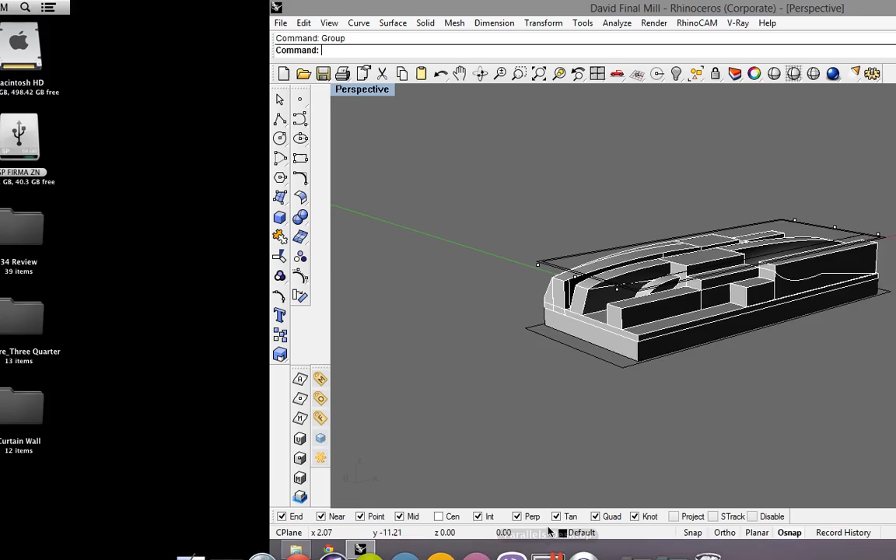I have Windows open right here. This is one of the template files I'll send you guys, and I'll probably just send it with David's model so you know where to position everything.

David's model at the moment has the top of his model resting on the CPlane. So you guys will just have to drag your models in here. There's a little box in here—just drag it to one of the corners so it's flush in line with David's model, and then delete David's model out of the way.

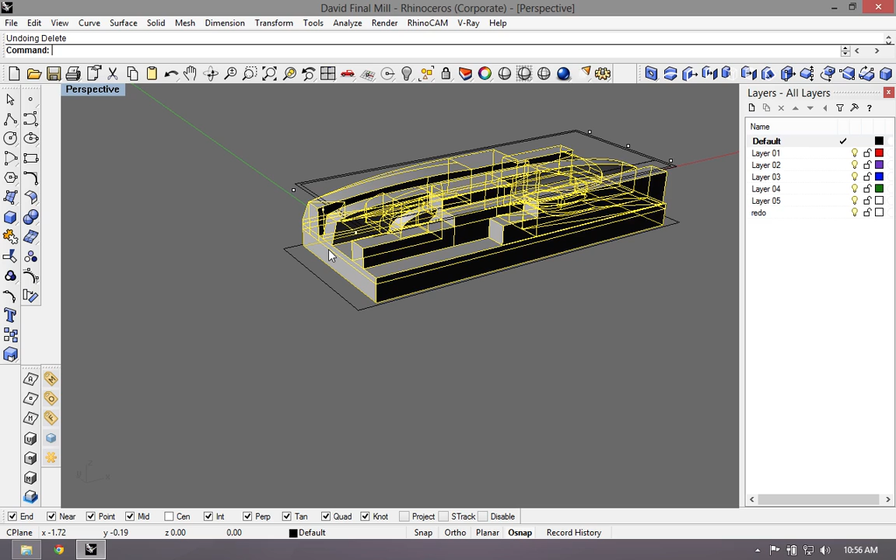Go ahead and open RhinoCAM, if you haven't already done so. Let me adjust my screen here.

I'm going to go through all of these—I guess they're called machining operations—and these are the ones that you're going to have to do. They're called mill passes when you're actually doing them on the mill. So I'll go one by one and tell you what you guys need.

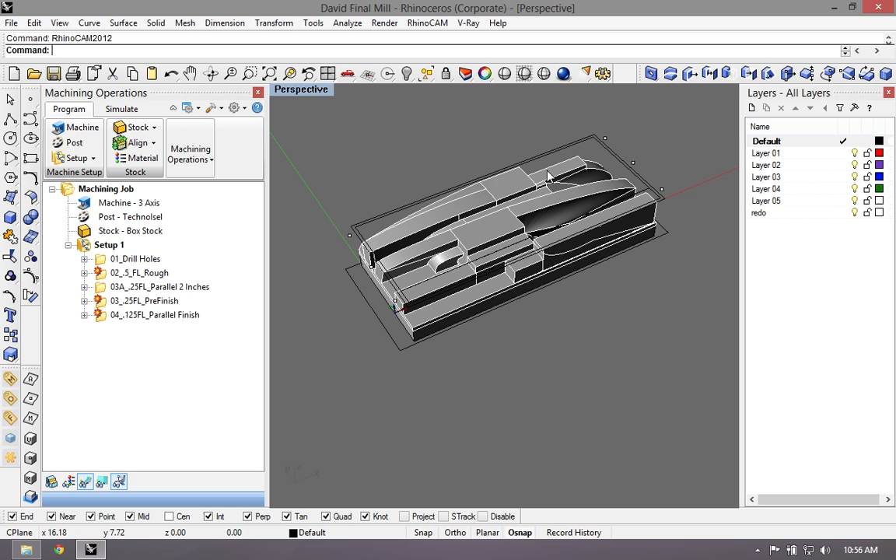So if you open up the template, you'll notice that you have these 6 dots, 6 points right here. Try not to move those points. Those points are going to define the spots where you're going to drill your screws, and those are important because we need them in the material, but not touching your model.

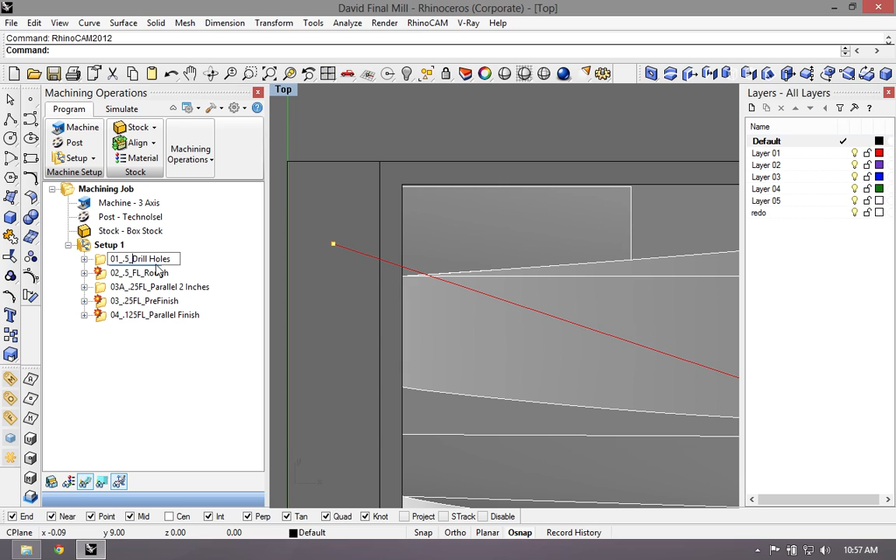So these drill holes are going to be made with, I guess, a 0.5 drill bit, so the 1/2 inch drill bit. I'll put that in there so everybody knows. They're going in about 2 inches into the material, that way they carve a nice hole, a nice little tunnel, so you can insert a drill and see how far it's going. Your drill head will be right here, going all the way through the bed. That's important for everybody to have, so we can secure the piece of foam into the bed.

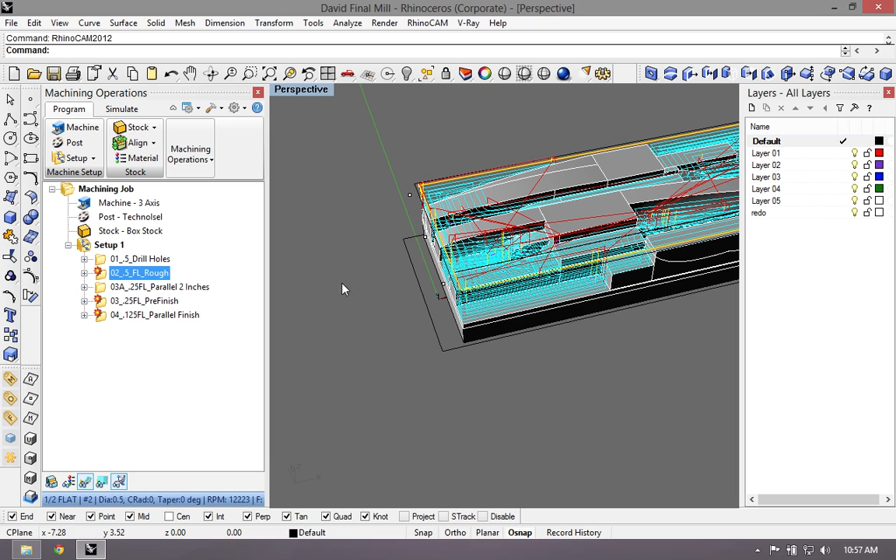The next step that we're going to do is the rough, and this is going to be done with the same 1/2 inch bit, so you won't have to switch bits between passes. As you can see, these blue lines represent where the drill bit is going to be traveling through. The red lines represent every time the drill bit has to reposition itself around the model, so it goes up to not touch your model.

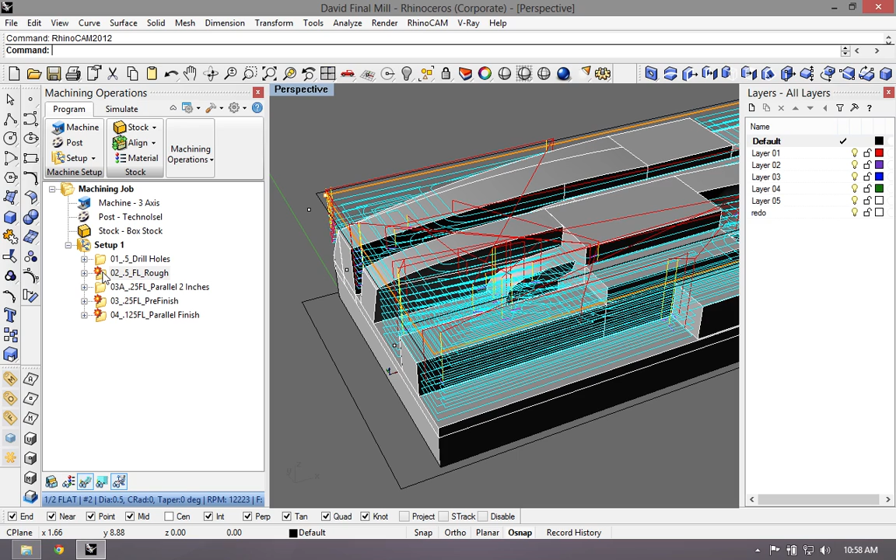We're going to open that and redo it in a second—I'll show you guys how to redo all that, but I'm just going to go through the different passes first. Keep in mind they're labeled 1, 2, 3, and 4. 3A is just something in between, so they still go in order. Number 2 is the rough pass that we just talked about.

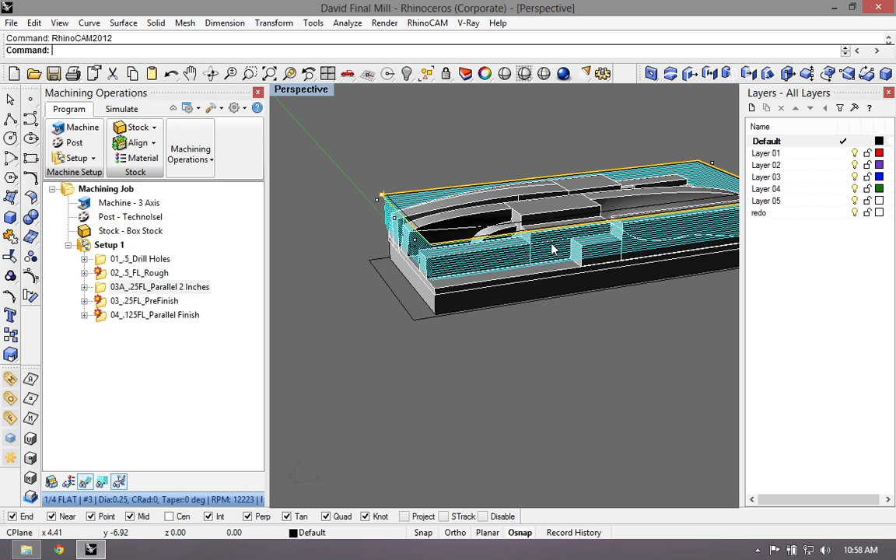The number 3A pass is going to be an important pass because there's no machine that can actually cut our 4-inch thick piece of high density foam in one pass. So it's important that we cut it down, and this is basically what this is doing—taking the drill bit and going around your material and making kind of like a plateau around it.

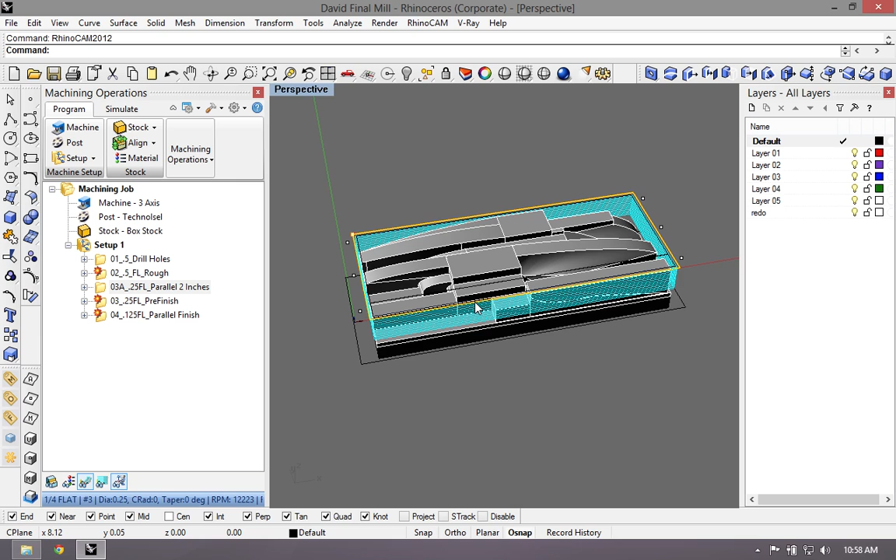This is going to make a 2-inch plateau, so that we can just put it to the bandsaw, the table saw, and cut that off in one pass and not have to flip it over and mess up the face of your mill. That's an important step, and everybody should have it in their piece.

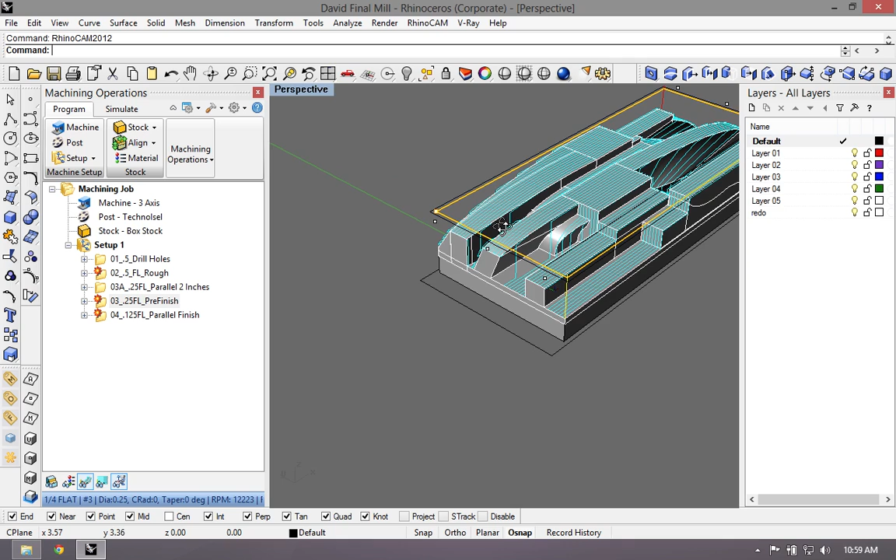After that, we're going to do the pre-finish, and the pre-finish is going to be done with a 1/4 inch drill bit flathead. As you can see, it just kind of goes in there and removes the rest of the material without actually touching your model, the finish of your model. So we're just going to go over and remove any excess material.

That way the 1/8 inch bit parallel finish can just go in smoothly and not really have to go through a lot of material and break. This is high density foam, and sometimes the 1/8 inch bits can break.

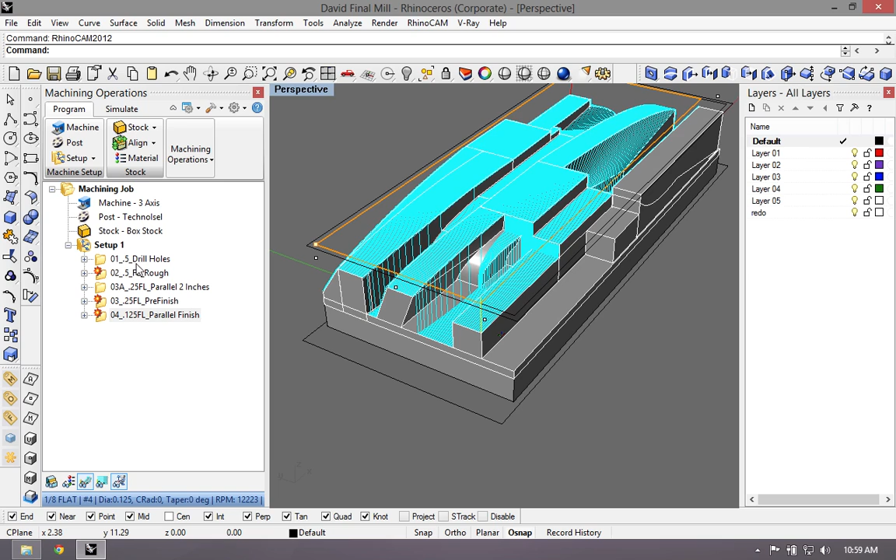So I'm going to have to fix this. Right now it's going over only this rectangle, but it has to go over the full rectangle. So let's go ahead and delete these, and I'll show you guys how to set these up. The drill holes, you're not going to have to redo - they're already going to be there. Actually, let's just go ahead and delete them and do them over. It's fine.

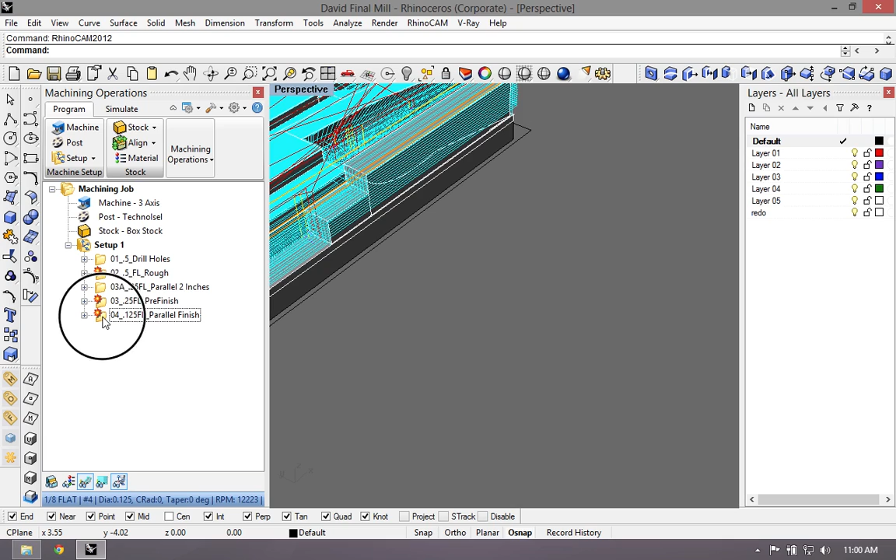I'm having a little bit of trouble here with my keyboard. Let me see if I can delete these guys. There you go.

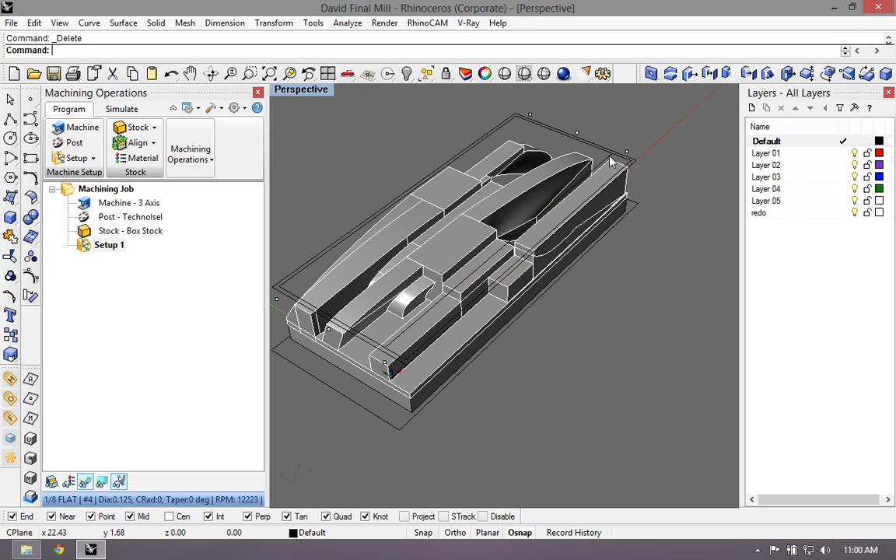Okay, so first step, I'll make sure these little in-between rectangles don't exist. So you only need this one and this one.

Okay, so first of all, we're going to do the drill pass. Select all your points, and you can do that by going into this little button here and selecting these little point things, or you can just go manually and select all of them. And you're going to go to the machining operations, and it's called a hole. So you go in there and you do a drill.

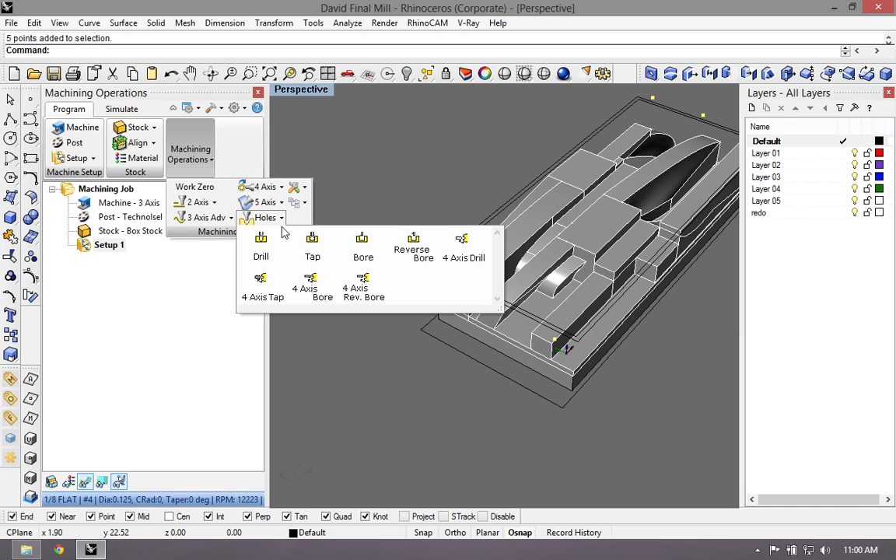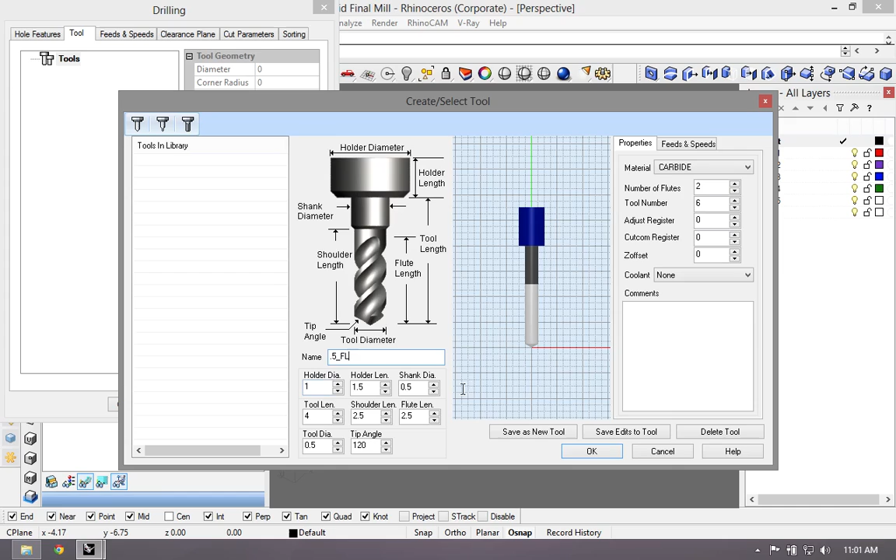Okay, you're going to make a tool. I already have it made, but let's just delete it so you can see how you do it. You're going to go edit, create tool, and from there you're going to select this one, the first one, and then just tell it that it's a 1/2 inch diameter - the drill bit is 1/2 inch in diameter - and name it 0.5 flat, because we're using a flat. So just save as new and hit OK.

Then as soon as you do that, it'll show up here, and that's the one you just have to select it and tell it that's the one you want to use. Feeds and speeds, you don't have to mess with that in any of the settings, not even the passes.

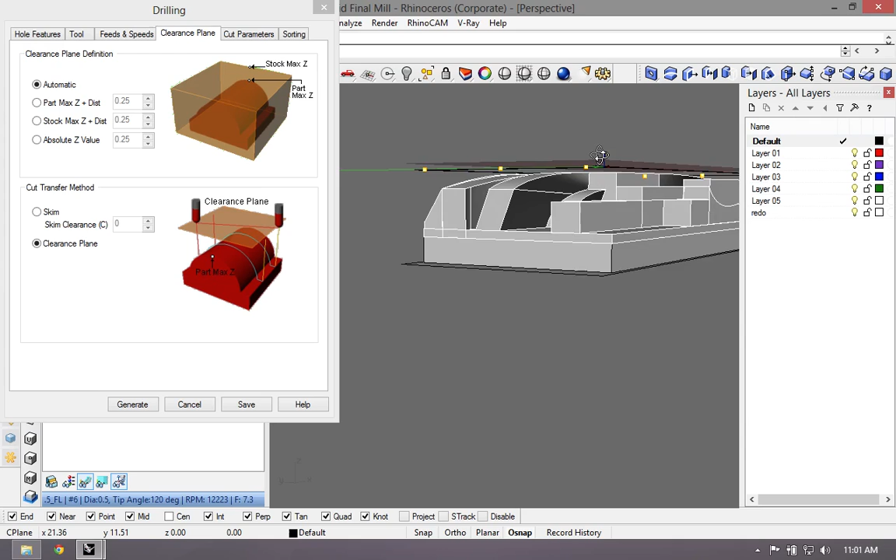Clearance plane, it's set to automatic right now. Automatic just goes a 1/4 inch above your material, so just make sure that visually it looks like it's going above your material, and this looks fine here.

And then this is the cut parameters. This is the most important step on the drilling passes. And right here they're going to tell it to go 2 inches deep. And everything else looks good.

Sorting, we're just going to go tell it to go minimum distance sort so that it goes from one to the next as close as possible. It's not jogging around. So minimum distance sorting, so we can just start from the lower left, and we hit generate.

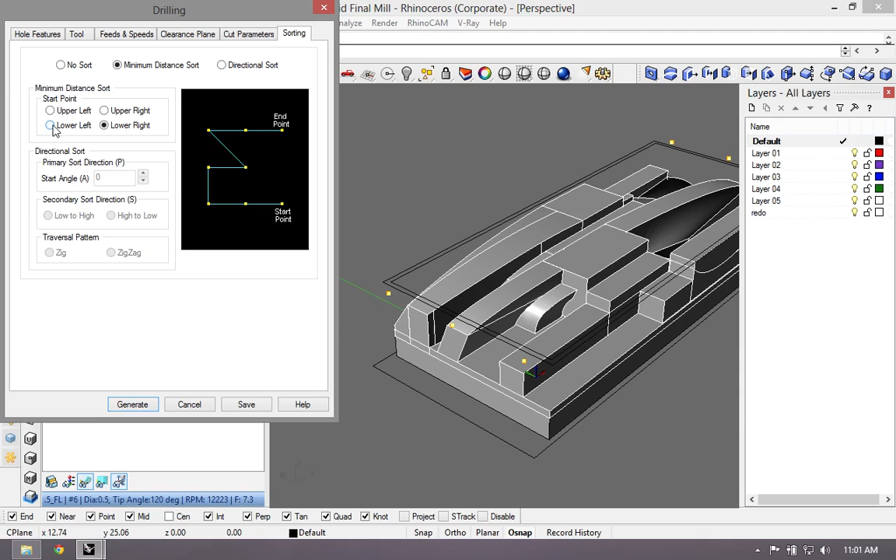It's going to do this little thing where it's going to show you, and as you can see, it's going from this one, it goes down 2 inches, lifts up, and then moves to the next one, goes down 2 inches, and it just keeps doing that all the way around until it's finished.

So we're going to call that 0.5 flat. Well, actually, that's the first step, so let's call it 01, 0.5 flat holes. Okay, then the next step is going to be the roughing.

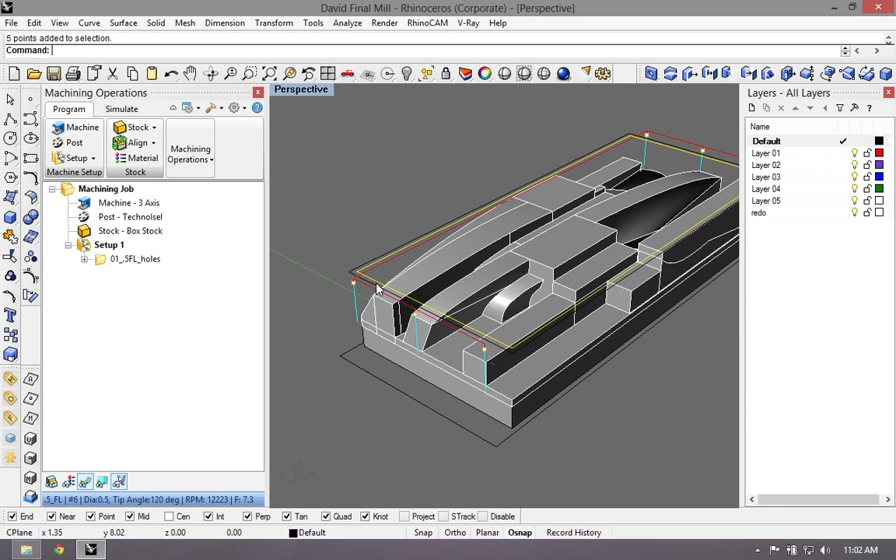So let's select the boundary, and that's, as you can see from the top view, the boundary is this box right here, not this one, not that one. That one's for our parallel finish because it has to go around it. And then this one is the one you want to select.

So have that selected, and then go into machining operations. Here we don't need this layer box, let me delete that. And it's going to be a 3-axis, and it's going to be the first one, horizontal roughing.

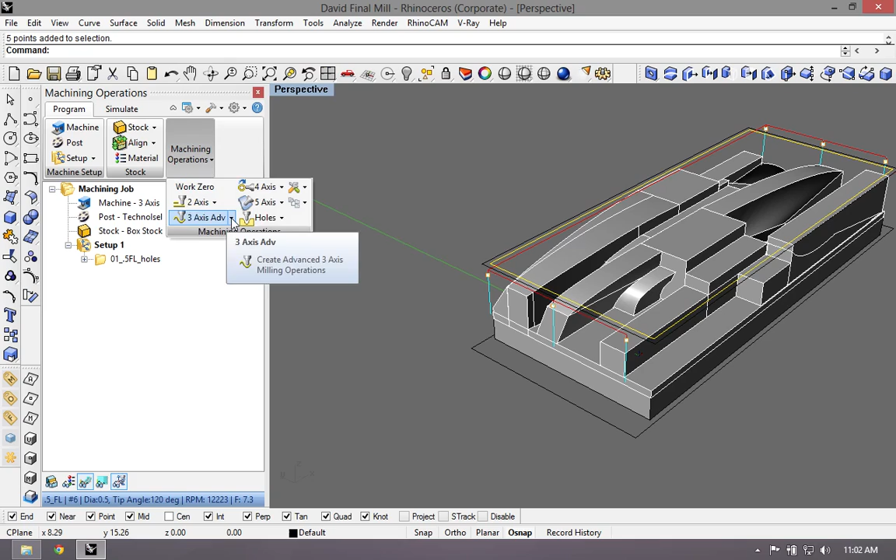We have our machine region already selected, and I have all these tools made. You make them just the same way that I made the previous ones, but I'll delete this one. I'll show you how to make one.

So again, you make sure you select the flathead. You see kind of they all have their own individual profiles. You select the flathead, and then you name it. So this one is going to be the 1/2 inch flat, and we just got to check here under the tool diameter that it is 1/2 inches, and we say that it's a new tool, and we just say yes.

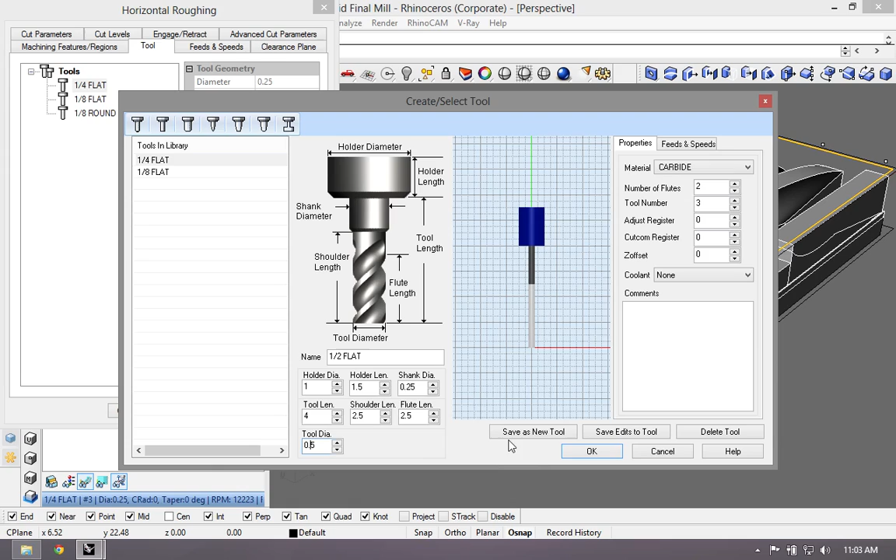Hit OK, and then we select it. Feeds and speeds, we ignore that. Clearance plane, remember you just have to visually check that it's above your material.

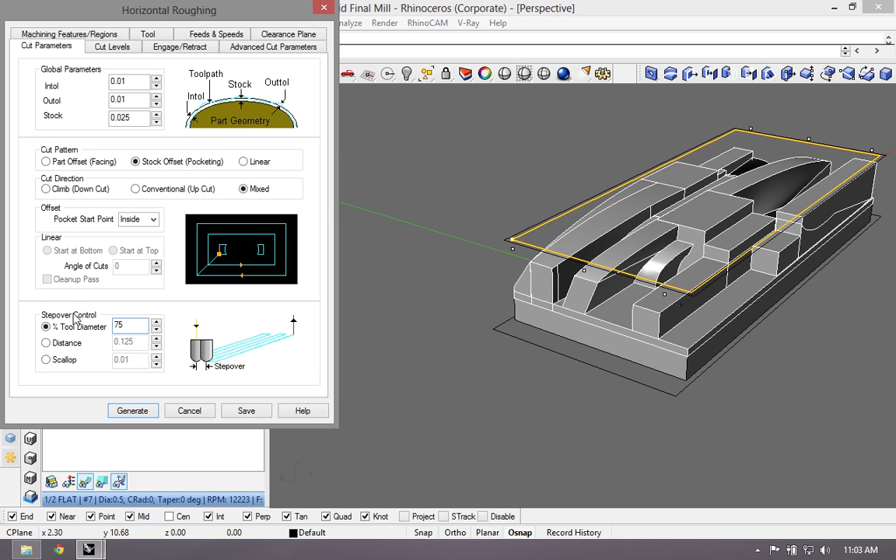That's good. The cut parameters, this is the most important one. For the roughing, you just want to make sure you have 75% stepover control here. Everything else is fine. Cut levels, that's fine, you don't have to change anything in there. Engage/retract is fine, and advanced cut parameters is fine. You just hit generate. We're gonna wait for that to compute, and it should be done in a couple seconds.

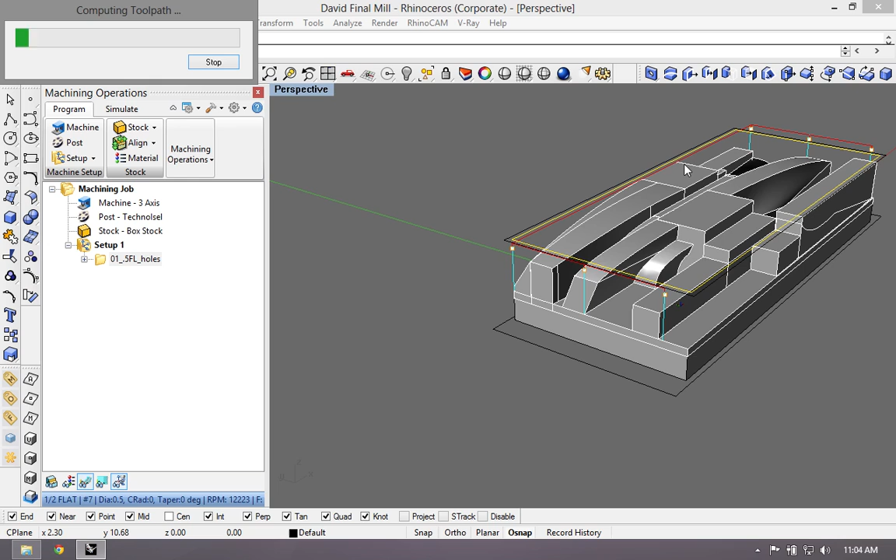Okay, and we have a rough pass there. It looks good. We're going to call that step number 2, that's with a 1/2 inch flathead, and then we're going to call that rough.

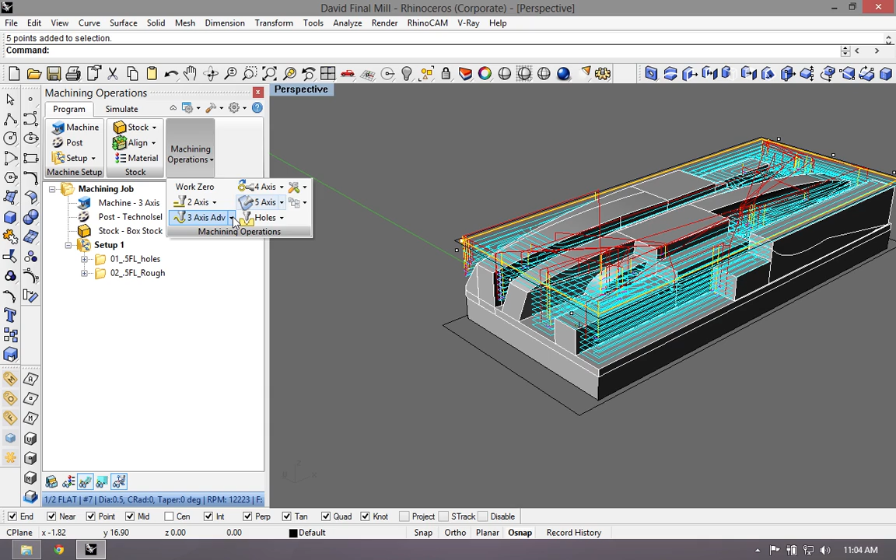Okay, and then having the same boundary box selected, we're going to go into the next operation, and we're going to do a parallel finish. And this one we're going to select the 1/4 inch flat. Okay, and then we're going to ignore the feeds and speeds.

We're going to go into the clearance plane. It should be the same, so just make sure, just verify that it's okay. Cut parameters, and this one we're going to go 75% as well, because we're just trying to get rid of the excess material.

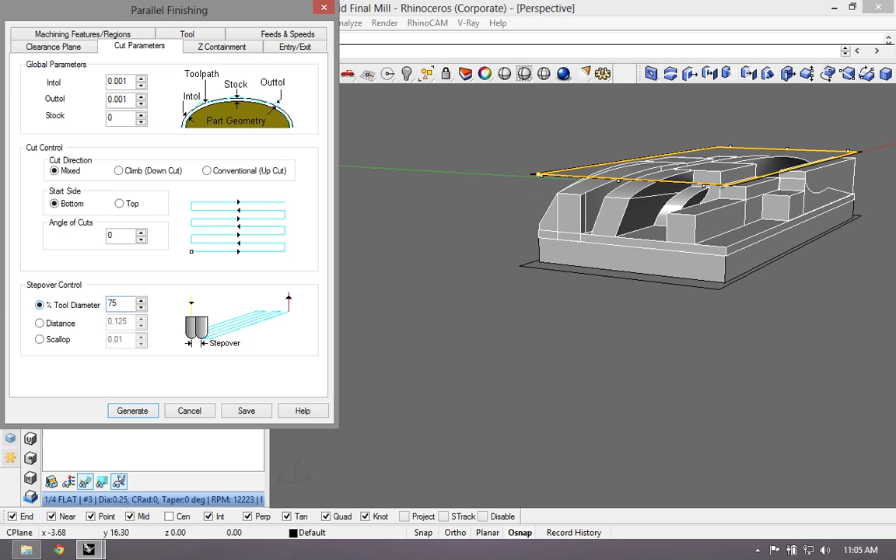And then this one we're going to have, we're going to tell it to go conventional upcut, and that just means that the location of the flutes on the drill bit is cutting up, so all the material is coming up. That's all that means. And then entry and exit and containment, that's fine, so we don't have to mess with those settings.

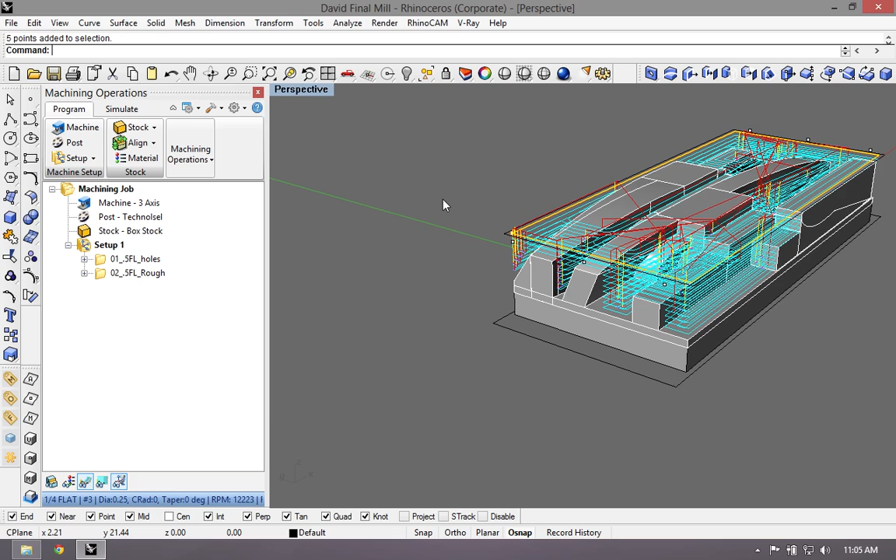And we'll just hit generate. So as you can see, actually this seems like a complex program, but it's actually pretty simple. And we have an issue because we don't want these red lines, so let me see what's wrong with that.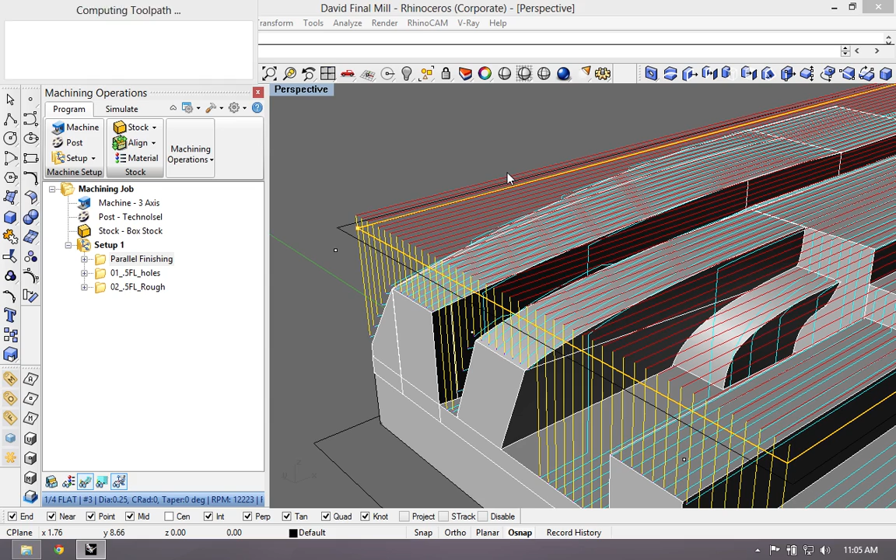Maybe we don't need conventional cut, we just need regular. We just need mix maybe. So let's see, yeah, mix. So don't go conventional upcut, go mixed. And you saw that setting that I just clicked. That just makes sure that it doesn't lift up off of the material and just keeps going back in a zigzag pattern. So that's our step number 3.

Oh, that's going to be 3B. We missed a step before that. We'll do that right now. It doesn't really matter because we can put them in any order we want. Just remember, this is a 0.25 inch flathead, and this is our pre-finish.

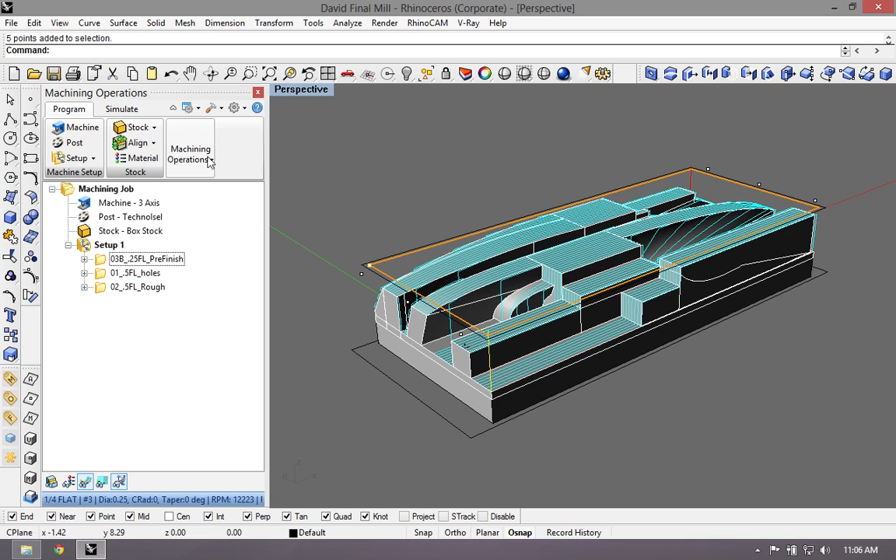Okay, so we're going to do that parallel pass that I told you guys earlier about, making the plateau around your model. So for that one, we have to select this outer line right here, and that one is a 2 1/2 axis, and it's called a profile.

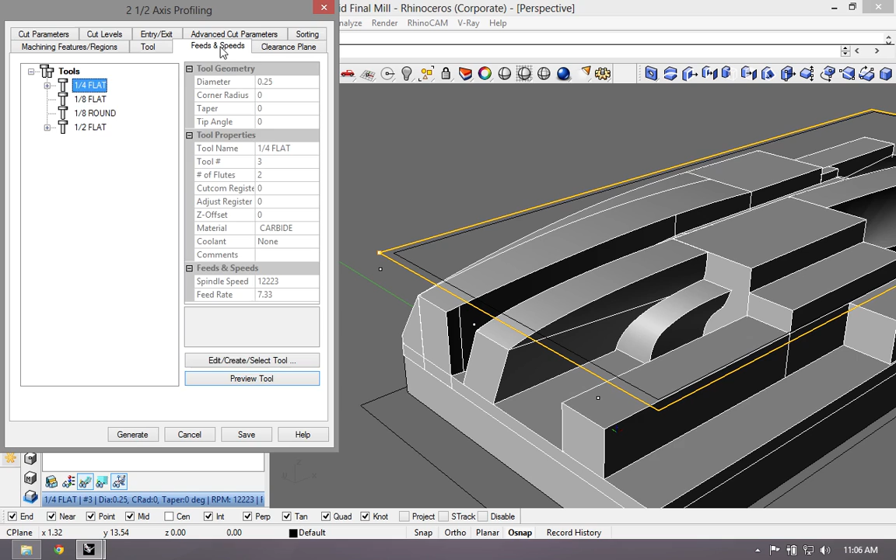And for that one, we're going to do it with the same 1/4 inch flat, so we select that. Feeds and speeds we don't have to worry about. Clearance plane should be automatic in the same spot.

And then our cut parameters, we want it conventional upcut. This is the one that we need, conventional upcut.

And our cut levels, this is important, pay attention here. We're going to go a total depth of 2 inches, but our step down, and this is a little bit hard to explain, but just put these numbers in there. We're going to go 1/8 of an inch, that's half of the drill bit that we're using. We're using a 1/4, so we put half of that, so that's an 1/8. We leave that alone, and then this is going to be automatically set to 1/8, and then we got to change this one to 1/8, so 0.125.

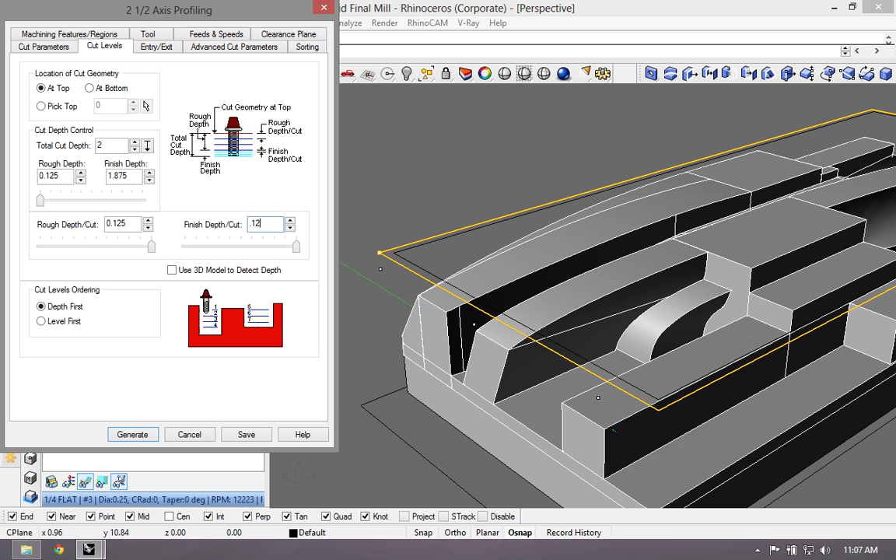And entry and exit, this one is important. On this one, we just have to put none on both, so none here, none there. Advanced cut parameters are not important, and sorting is not important, so we hit generate.

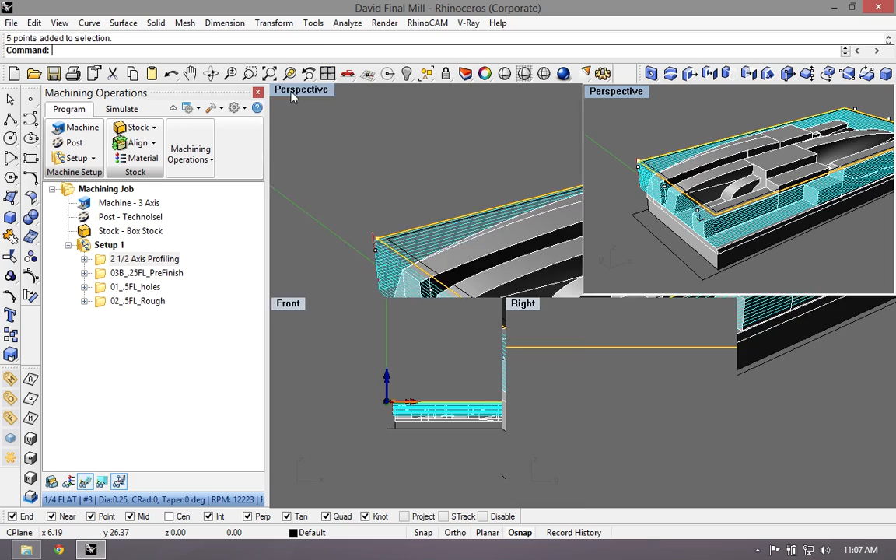You see that it's going to be doing laps around our model, just around it, not actually touching our model. This is important—go back into it, and under cut parameters, tell it to go on the inside, and hit generate.

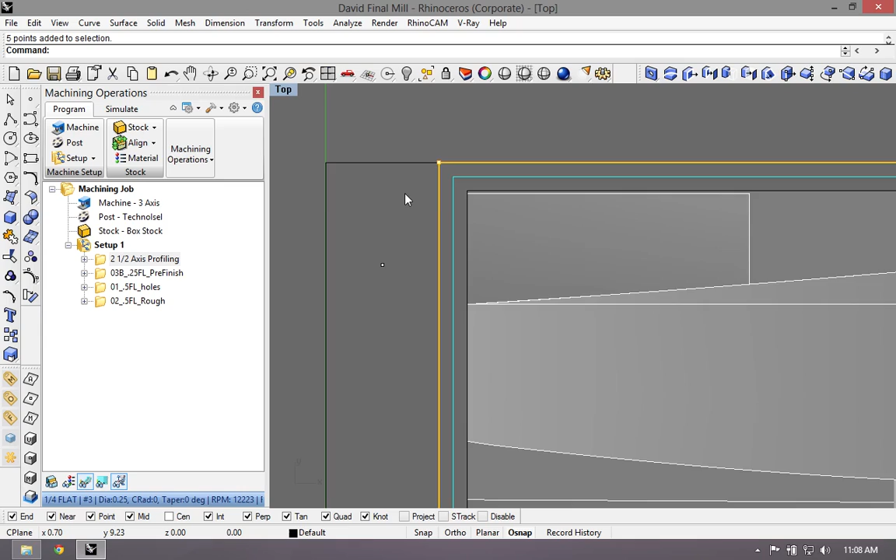This is the center of the drill bit, and it's a 1/4 inch drill bit, so the drill bit will look something like this, and as it travels around, it will be removing the material right on the perimeter of our model and a little bit here. So it won't actually be touching our model. That's important so that we can later cut the model in one pass through the table saw.

We call that 03A—that's 0.25 flat, and that's called profile, 2 inches. We can move these to the end here, just by dragging them.

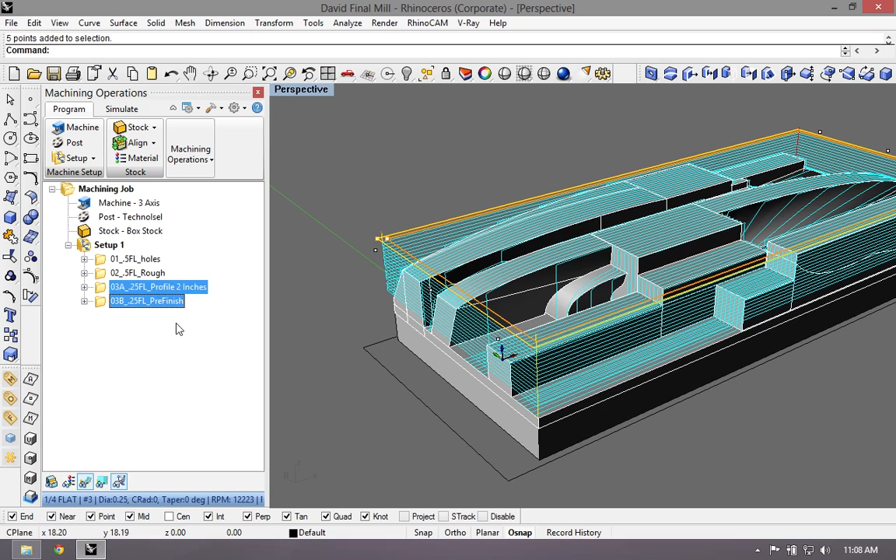The last step is our finish. We're going to select this inside one again, not the outside one, and go to parallel finishing. This all depends on what kind of finishing everybody wants, but I recommend you just stick to the standard one, parallel finishing. As you can see, there are a lot of other options here—sorry, not 2 axes, 3 axes—and you can see the different types of finishes.

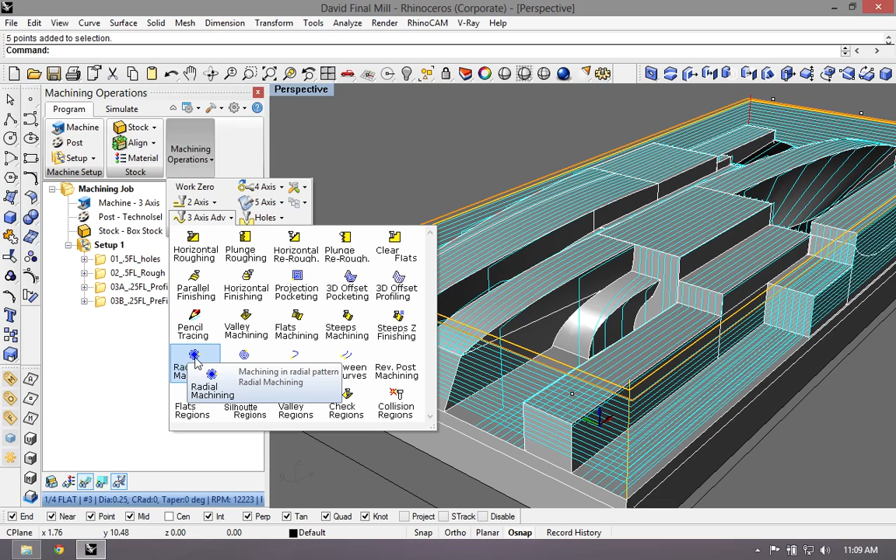There's parallel finishing, where it's basically going side to side. Horizontal finishing starts at the highest peak on your model and then starts going around it. Spiral machining is just what it sounds like—it goes in a little spiral. Radial machining starts doing little angles from the center outward. So they're all kind of different. I've never really played around with them; I've always done parallel finish, so we're going to do that for now.

For this one, for the final finish, we're going to use 1/8 flat, and our clearance plane again. Cut parameter, we're going to do 25%. This is the smallest that I recommend you go, because if you have a lot of detail in your model and you go anything less than this, it'll exponentially increase the time of your mill.

I went from 25%, mine was taking 1.5 hours, and then I switched it to 20%, and it actually went to 3.5 hours. So it's a lot of difference—just keep that in mind. Everything else is fine, so the cut parameter is 25%, and we just generate that pass.

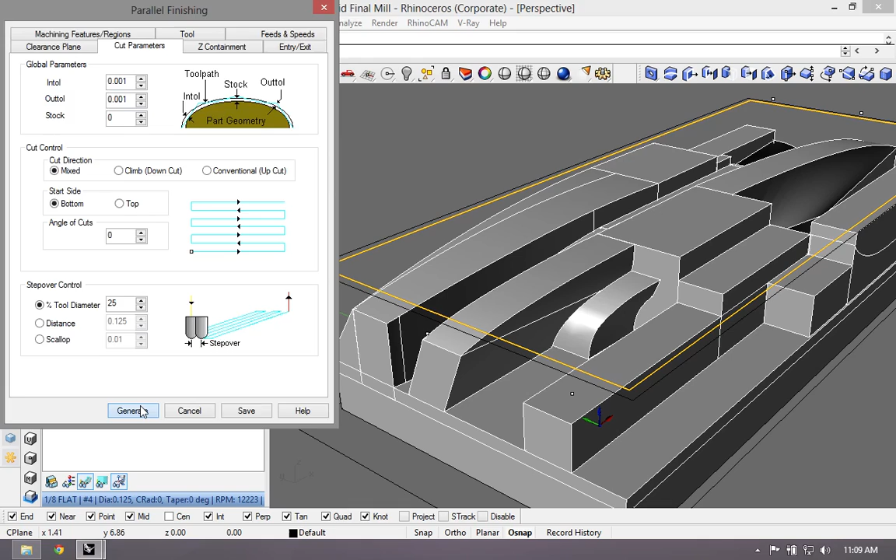And there we have it. We'll call that 04—that's a 1/8 inch.

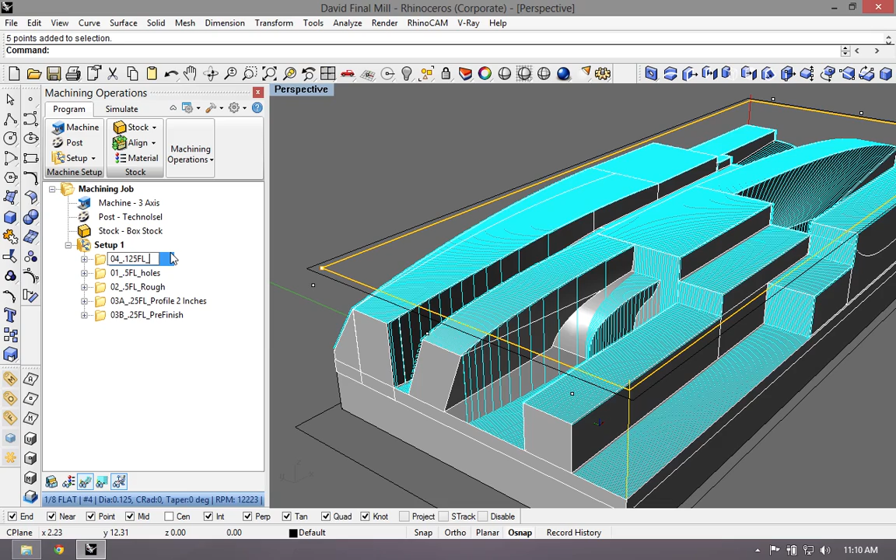The reason I'm naming these files this way is because you're going to post them and load them into the CNC program at the laboratory in this order, and this naming will remind you what kind of drill bit you're using, so you don't use the wrong one and mess up your file. So this is the actual finish, and it's number 4.

Over here—it doesn't want to move, but anyways, you can move it on your own.

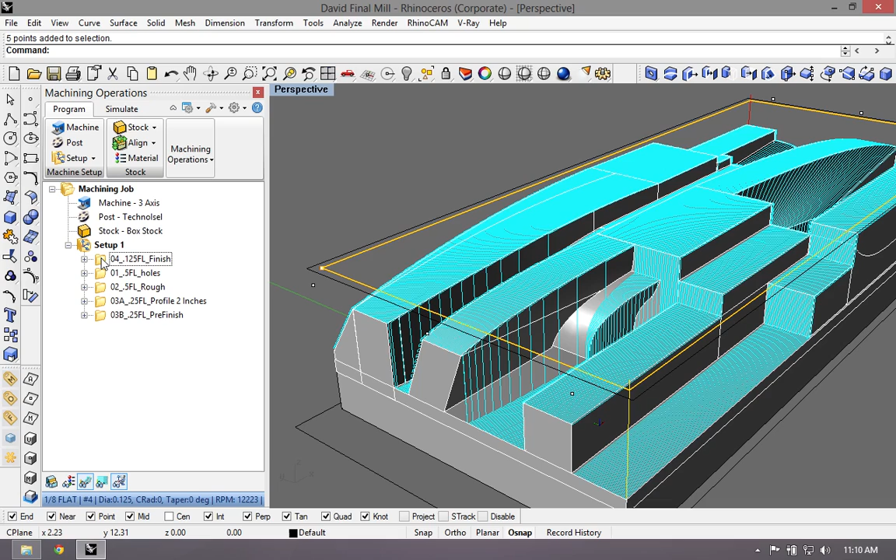But basically, we are done at this point. What you're going to do with this file, if you're working in the lab, is call up one of the TAs and have them verify that all your settings are okay. They're going to look at the model and turn it around, make sure there's nothing weird about it. At that point, they'll give you the go-ahead and show you how to post the files and load them up into the machine. If you've done the tutorial, hopefully you've learned by now how to load this up into the computers and set up the mill.